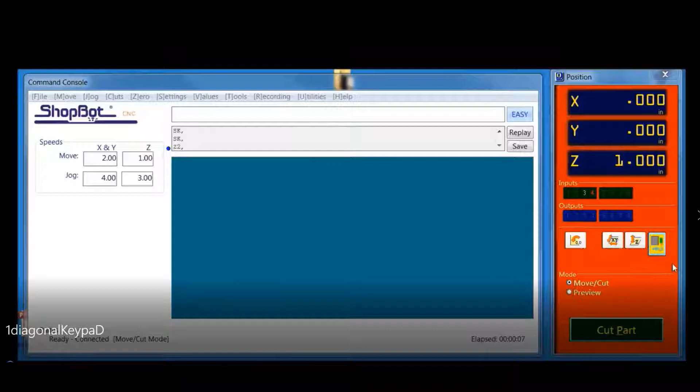All right, so for this first one, let's look at using the diagonal and the keypad. So in the ShopBot 3 software, if you bring up the keypad and you hover in between the arrow keys, you'll see that it says move diagonally in the positive X and the positive Y. So it does say that in that area, but also so you know, all four corners will allow you. Down is the negative X and Y, and again, they may not have the message that comes up, but all four of them do work for plus and minus your different quadrants.

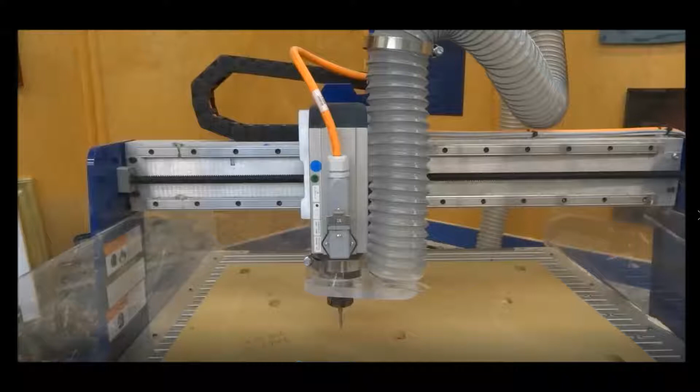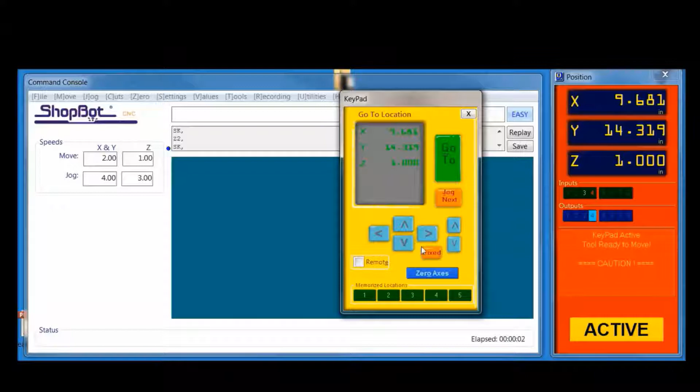So holding up there allows both your X and Y axes to move out of the way. Just a convenient little tip and trick. Allows you to move it positive X and Y axes at the same time. And also, like we saw here on the keypad, if we move our arrow down to the negative portion of it, it'll do the same thing that we were doing in positive and move back down to the negative. So you can do negative X and Y axes here. So that would be in between your keys on the keypad for moving your X and Y axes in a diagonal.

The next one we're going to look at is naming toolpaths. This is something that will really help you when you're out at your machine trying to load files. It helps with organization. So when you get your project ready, this is an inlay sign that we did in a previous training. Really, this just comes down to you coming up with a method that works for you. However it is that you want to label it, so it makes it easier for you to locate, find, and load the correct files. So just a personal preference on this one, and then I'll also show you a couple here that Buddy recommended, because this was his tip of the day.

And what you have here is you have 5 different toolpaths. They're ordered number 1 through 5. They have the name of the project, welcome sign, in the toolpath name. They also have abbreviated or spelled out, depending on what they are. PKT for pocket. You have texture, inlay, cutout for your through cut. Really get into whatever it is that you want to write in there. It's up to you. Things that I do want to point out here is we do use an underscore or a period, and you don't see any other special characters or anything in there.

And what's nice about this is when you go click here to save, whatever you have typed in here is what's going to show up in your file as the .sbp file. And again, that's another tip in the software with naming files, is you want to stay away from special characters, because those in Windows can butt heads sometimes when you're saving a file with a special character in it.

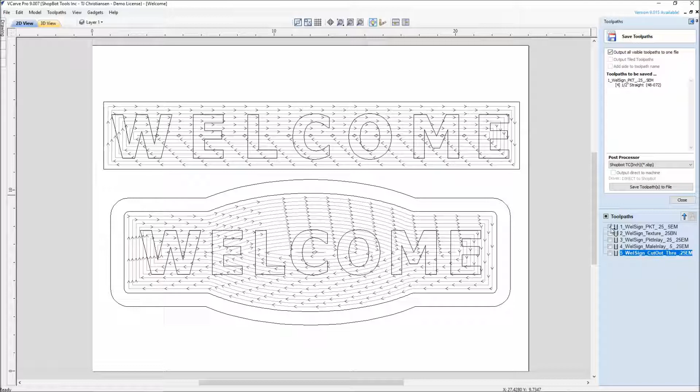And there's still a lot of people that prefer that method, where they like to run one toolpath at a time. So if this welcome sign was something I was ready to go cut right now, there's 2 ways I would go about doing this. One is I have everything highlighted and I hit Save Toolpaths to File. I save that as one bulk file. Or I would click these one at a time. And that's why we have the number in there, 1, 2, 3, 4, 5.

And remember, it's the click. It's not what's highlighted here, it's what actually is checked. And every time you click that one and you save it, that checked one shows up there. And also a tip for you guys at home: you have all 5 of these clicked and you go, how come it's only showing one of them up here? It's because you don't have this output all visible toolpaths to one file checked. If that's not checked, it's whichever one is highlighted here.

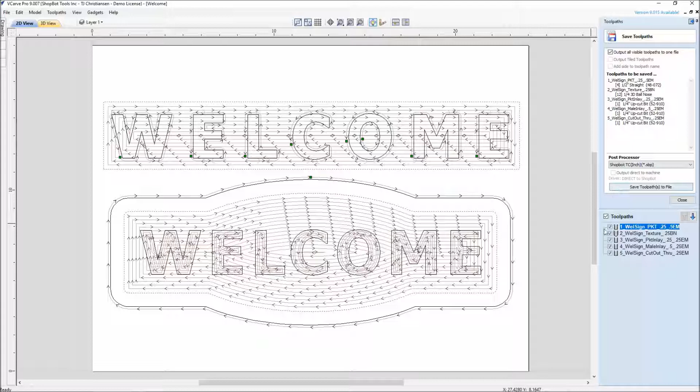So this is a screen that usually gets looked over because we use it the one way that we've only known how to use it. But knowing that if you have this checked, you're able to have multiple toolpaths, which are all 5 with 3 different bits. So again, this one tip has 2 different options. I can save all 5 as one file, or I can save them one at a time.

And just to show you what that looks like here, if I save the welcome sign.tc for tool change, when I go into this file, you will see that it has tool number 4, which was my 1/2 inch straight, and then it goes down through the lines of code. And if I was to scroll through all of these, it's going to find my different tools for my different cuts, and it's going to actually have me pause mid-cut. New path, 1/4 inch ball nose, tool number 12, and the screen will prompt you to do a tool change. So that is a nice feature.

If you have an automatic tool changer machine, it's going to automatically change the bit for you. But even for us that have a manual 1 spindle, 1 collet ShopBot, we're able to just have one file going. Some people prefer not to do this because there could be an issue with re-zeroing. Maybe you forgot to put the clip on, or you weren't ready with the right bit, and then here you are mid-file with a little bit of a hiccup in your process.

So what some people do instead is, underneath my Toolpaths folder here, you can see I named all 5 of those 1, 2, 3, 4, 5. So there's your 1 welcome sign. It's a pocket, 0.25, 0.5 end mill. So there's a really good description in the tool name.

So use some abbreviations. If it was a V bit for V carving, I might go V90 because it's a 90 degree, or V60 depending on what it is. You might also add a U or a D for an up spiral or down spiral. But really, this tip is just naming your toolpaths, or naming your files in general, in a way that makes it more convenient for you.

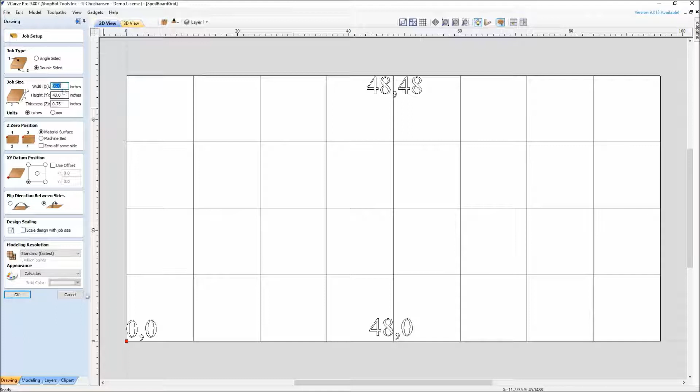Well, this next one was asked by Brian King, and it was a spoilboard grid. This one's really nice for laying a grid out on your ShopBot's deck for layout purposes and for making temporary zeros. So all I've done is, this is a 96 by 48 table, and I've made a grid every 12 inches, 12, 24, 36, 48, all the way up to 96 in the X, and then 48 in the Y. Took my text tool, made my 0,0, and even put on a couple reference points.

I know a few ShopBotters that have done this over the years, and it's really just a nice way to lay out a grid on your machine. So if you are out in your shop and you're going to be using a different spot where you're working, and you're going to put your board down here, you can use the grid that you put in there.

And instead of carving down into your spoil board, what you would use for this is something that WidgetWorks makes, and this one here is called the plotter pen. It's different color Sharpies, and it goes in this little holder; it's not really spring loaded, but it does have some give. And what's nice about all these little WidgetWorks accessories is they come with a nice set of instructions on how to set them up in your tool database with feeds and speeds, but it uses a Sharpie marker instead of a bit, so you're not actually cutting.

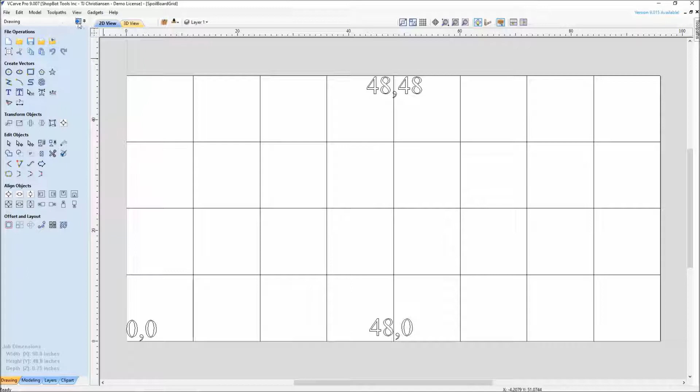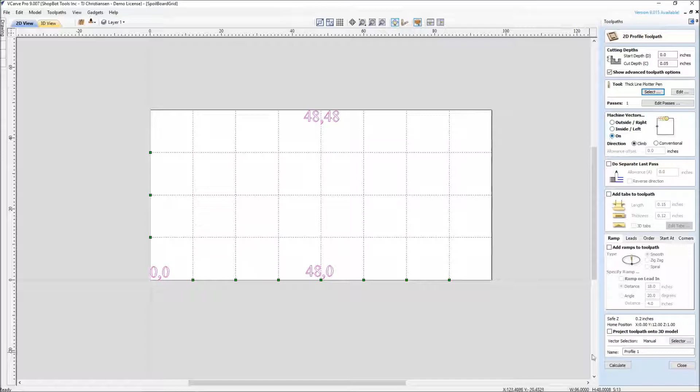And then with this one here, again, you just toolpath this one as a profile toolpath. Select everything, and then, again, I'm using the instructions that come with this WidgetWorks thick line plotter pen. It says to have a pass depth of 0.05. There's my 0.05 cut depth. It's just a profile toolpath on the line, and I hit calculate. And you could go through and set this up to be more efficient as far as your toolpath cut.

But what this would do is lay a grid on your spoil board, and then you have something for referencing, for doing different areas for temporary zeros and holding your part down in different spots. So the only thing I would recommend before you lay a grid on there is to surface your table so it's nice and flat, and it also gets rid of any divots or whatnot in there from the previous cut.

So nice flat table, and then this one is called a spoil board grid, and you could set this up to whatever increment size that you want. Some people have even V-carved these lines down into their table instead of drawing them with the WidgetWorks plotter. So, spoil board grid.

Okay, we had another one from Brian, and that one is safe Z pull-up for your Z-axis. And he brought up a great point: hey, I just got done changing my bit, or I put a bit in for the day, I zero my Z-axis, and it only lifts up half an inch, which means you have to go get your keypad and move it up so you can get your dust foot back on. So to change that safe Z, we'll show you how to do that.

The only thing I want to point out to you guys with smaller machines that don't have as much Z clearance, or if you're using a longer bit, if you put too much of a safe Z pull-up, you could lift your axis too high, and that could top out and lose position. But right here, we are going to look at V for values, and then C for cutter values. VC is our quick command. VC right here, and right here we have a safe Z pull-up. The default here is half an inch.

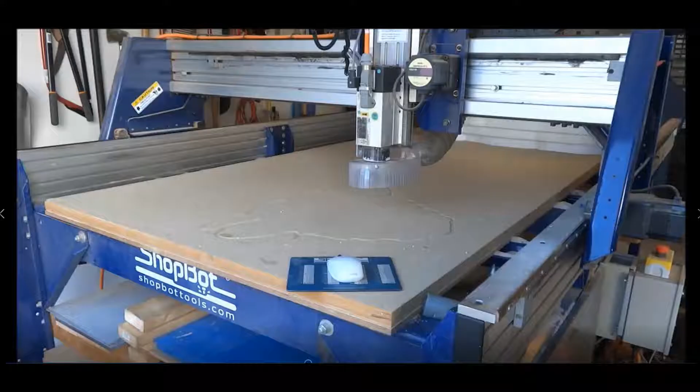And we click on that, and we'll look out here on our machine. And for this one here, I'm just going to use the wireless mouse on the computer. Your left and right mouse keys will allow you to move back and forth, and then to change the axes that you want, that's where that center scroll wheel comes in, you just push that down. So I just switched to the Y axis, and now there's your positive and your negative direction.

And then again, I can hit the center scroll wheel down once, and it changes to the Z axis. Same thing, back and forth. And then again, if you wanted to go back to your X, you would just click on that center scroll wheel again. So there you go, there's remote pendant.

Well, this next one we're going to look at is staying with keypad, and this one was by Matt, and this is keypad speeds. So there's different speeds you can move around while you're in your keypad. This is really helpful on your longer 8-foot and above tables. So here's your regular keypad, and you use your arrow keys for moving it, which is just your move speed.

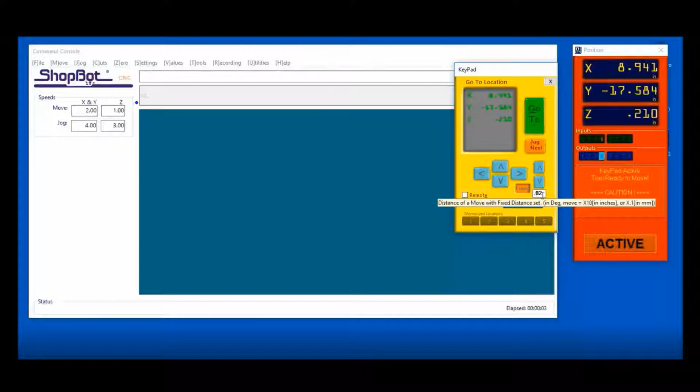But when you hold the control key down and move it, it's now going to be going at a jog speed. So we'll look at those two, and then we'll also look at switching into fixed mode for moving your machine, which is when you click on fixed, you're able to go in here and put whatever setting it is that you want to move your axes by. So it'll move in those exact increments as you're touching it off. So move speed, jog speed, and fixed mode are 3 different ways of moving around while using the keypad.

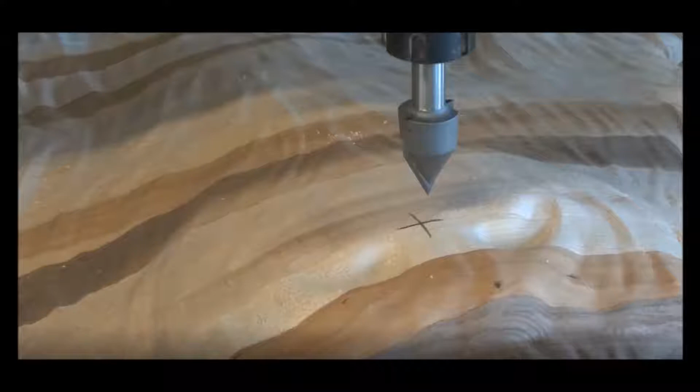So there's move speed. You can see I'll stop, hold the control key down, there's jog speed, and now when I get it close, I'll slow back down to move speed, get it very close to the X, so you can see back and forth. Now it's been put into fixed mode, where I set the increment and then go in there nice and easy.

So it makes it really nice for when you're aligning different positions, temporary zeros, and that would be moving in with the keypad in the fixed mode, and control key is what you hold down to move faster down your axis.

These next few tips are all in the ShopBot control software. These are by Frank, who spent many years with the tech support, so he's seen it all in the software. And one is just going between full mode and easy mode. So some people at home go, hey, where's this big screen coming from with the command console? You may be in something called easy mode, which I just clicked on there. And easy mode doesn't allow operators to go in and change those settings.

So it's really nice in a school where you don't want any variables or feeds or speeds being set in that area. So how to get out of easy mode and back to full is the next question, which is where you click on the question mark and then switch back to full mode here. And okay, yes, I can always click on easy to get back to easy mode, and here I am back at full.

So the first one is looking at changing speeds on the fly, and that one would be just going up here to help menu and printing out this and keeping this next to your ShopBot: the keyboard shortcuts. And I'll bring that up, and I've got to zoom in here a little bit. Apologies, my Acrobat Reader is a little bit large. And what we have here are some different commands that you can go through, and you print this out and have it next to your machine.

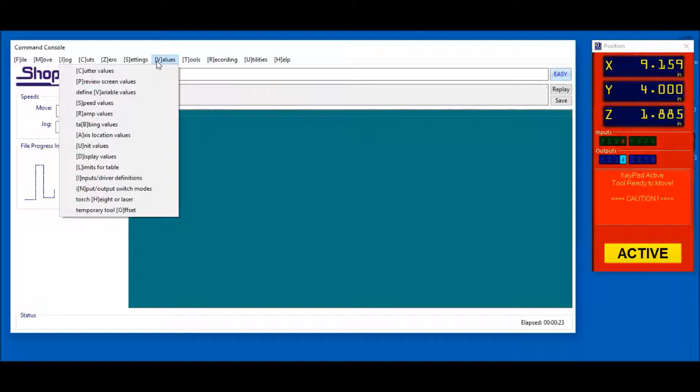What's really nice is you can't always see underneath your dust foot what shape it's cutting out, or the progress by looking at the board. You can stare right here at the computer screen and see how far along in the file you are. So again, this is your file progress indicator, under Values, Display Values, and it's right here - Show File Progress. Just another tip recommended by a customer.

Alright, this next one has a lot of impact for just changing one setting, and it's a pretty neat feature. What I'm looking to show you is underneath Values, Limits for Table. If you're somebody that uses your prox switches a lot, and your default is off, it's a good one to go here and turn on file limit checking. Watch what happens when I turn it on - I hit OK, nothing changes much.

But what's nice about having file limit checking on is when you go to run a simple file, like this one here that says 'far far away' that I want to V-carve, I go down to click my cut part, load 'far far away,' hit open, and hit start. It brings up a message now saying, hey, the X-axis is going to go beyond the software limits. What that means is this software is set up for a ShopBot Desktop, which is what this computer's hooked up to do, and it's going to go past that X limit, or Y, whatever it is.

It would say that on your screen. If you want to temporarily disable that, it means okay, the file's going to move forward and start cutting - so are you okay with that? You better check what's going on. For me, yikes, that's not right - I'm going to hit cancel out of this.

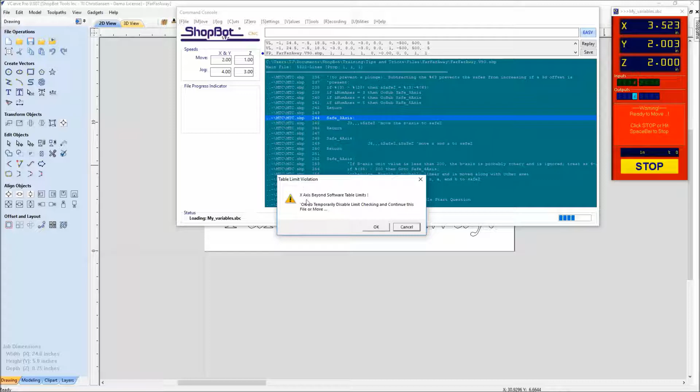So people that use a lot of temporary zeros and offsets may not be someone that turns this on, and that's why it's not default turned on when you purchase your ShopBot, but it's really a nice feature to leave on. So right now it is saying, hey, you're going to go past your X, so let's hit cancel.

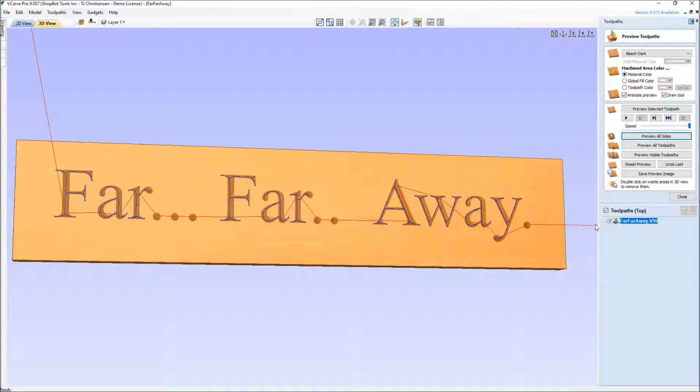Let's go back to our software and figure out what's going on here. If I would have spent the time doing my 3D preview and checking things out, still everything looks pretty darn good. I'm not seeing anything, but a couple little hints where you should be looking when this is turned on. Look at that red line. It's going out past, there's one indication something's not right.

In 2D view here, if I scroll out or hit F for full screen, whoa, I see that there was some extra text way over here that accidentally got highlighted. So what happened was when the V-carve was being set up, this was just maybe some earlier fonts that were being tested, or earlier parts of a project left out there in no man's land that accidentally got selected. Very easy to overlook.

So that's why that limits feature is really nice to turn on. In this case, I would just deselect that and recalculate this. So that one is, again, a very simple toggle in values, limits, turning it on or off, but look at what it can do for you.

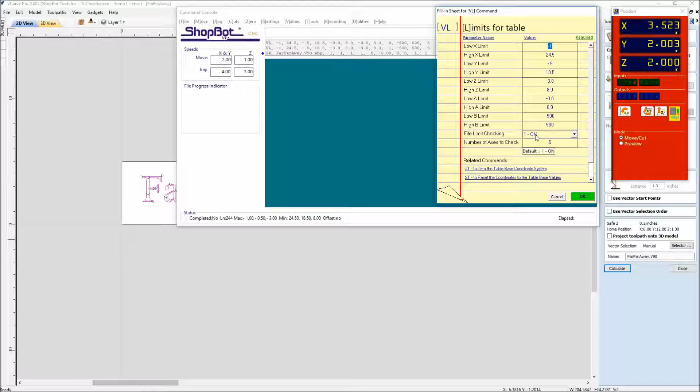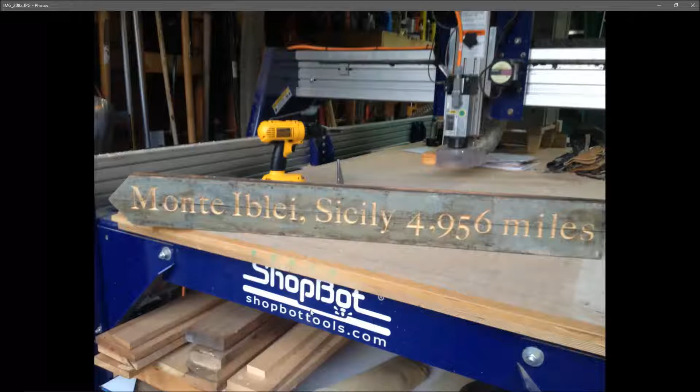All right, another one that was brought up by our staff, by Sturmer here, was when you're doing V-carving, especially with uneven material, to add a start depth down into your cut. It's real handy with uneven material, and you can see here this is a sign that I made out of old flooring from another building, and being old beat up material that's been around for 100 years, just to be safe, so I got down inside of it all. I actually gave it a start depth that was a little bit deeper than what I might have had the V-carving in the software set up for.

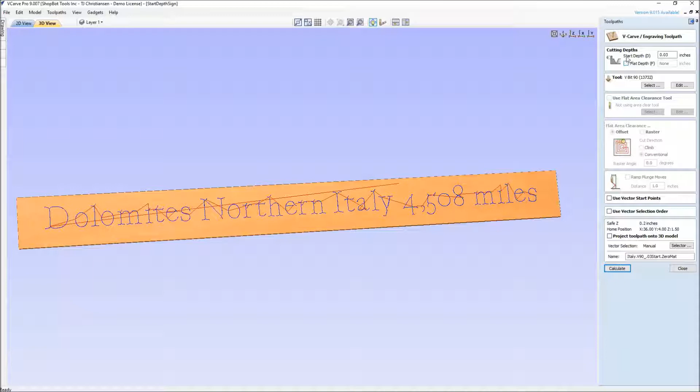So let's just look at exactly what it is I'm trying to say here. So there's just your file, and inside of the V-carve toolpath here, you actually give this a start depth of 20, 30 thousandths, and that will actually take the cutter and go down in a little bit deeper. So you start a few thousandths down into the material with the cut, and it helps out with uneven material. So if you're messing around with different signs, it's a nice tip for sign makers to get around uneven material.

And you can always sand and whatnot to the different spots, but some people are going to say, well, hey, it's cutting too deep or not enough. Uneven material is going to be one way or the other, that's just how it is. So I'd rather go a little bit deeper than not being able to cut deep enough and not seeing the sign. So this one is an example where we would give it a start depth for uneven material.

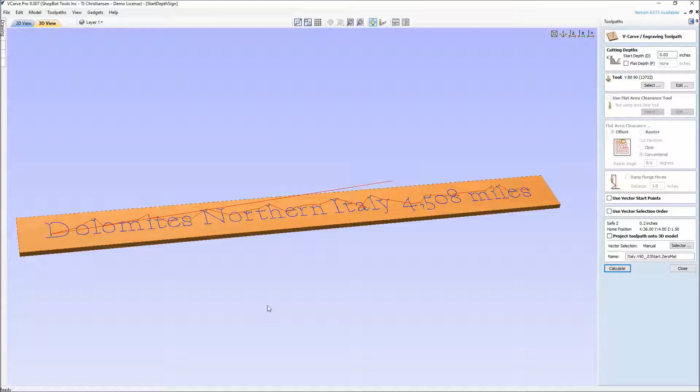One that our customers asked us to talk about is gadgets. What are gadgets? Gadgets are something that are built into the Vectric software. There may not be a key player yet where they're built into the regular icons, but if you go up here, you'll see that you do have some icons, some gadgets that do come with the software. And if you go to About, these are just the things that may be incorporated into the software at one time or another. They may just be left as a gadget, but they're useful little pieces of software that can be added in free of charge, it's just a matter of downloading them.

You can go to this website and read all about these more in depth, but things that I've personally enjoy using are the Gear Maker, the regular grid importer for Aspire, and the dovetail one is always a fun one to do. Dado toolpath creator, chamfers around edges, the auto dog bone is one that people like to use. So these are just parts of software that can be clicked on. Go in there, it explains how to use them, shows you how to download them, has some instructions. And what this would do here, example for the dog bone gadget, is it would go and add dog bones all the way around to any vector that needs a dog bone in the software versus you clicking on them all.

So that is Gadget, something to look into there.

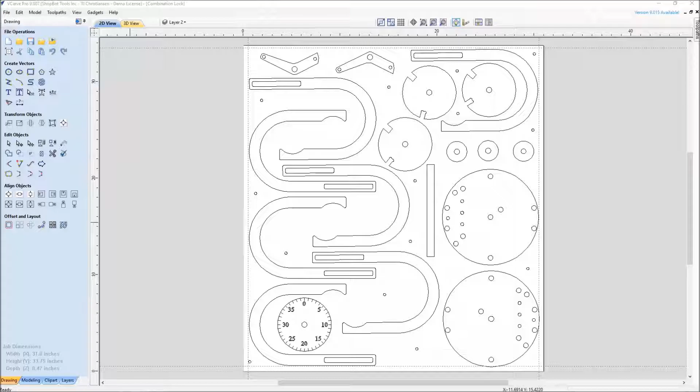This one here is one of my favorites: how to use drywall screws out in the field, meaning out in the middle of your board. How do you put them in without the bit hitting them? On a part like this where it's filled in pretty good, we'll look at the project so you can see what it is. It's a combination lock, one you can download from our website. I would never be able to efficiently put these screws out here and run with my screwdriver, and I need them out in the middle because there's a lot of little parts in this small board.

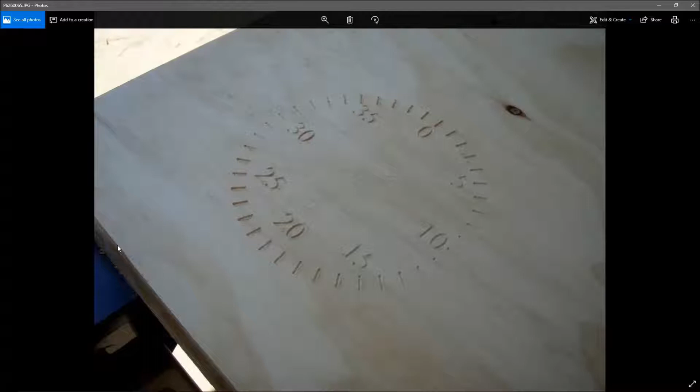So I use the Vectric software to lay out where my drywall screws are going to go, because that's the hold-down method I've chosen to use in this cut. So when I start my cutting, whether it's around my profile or my V carving, I'm never going to hit a screw head with my cutter, because I use the software to put the screws in a location where they're safe. They're close, but they're not going to hit.

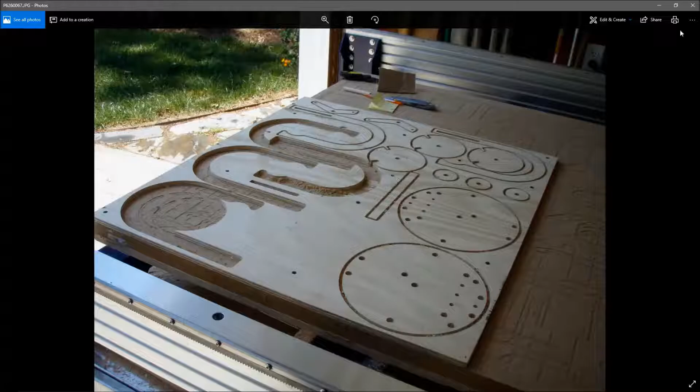So what happens for this, and the way I do this one, is I draw my parts, lay them out, and go as far as toolpathing them all so I know where everything's going to be. Then from here, I go up to where it says turn on the wireframe to solid, and I turn those to the purple solid.

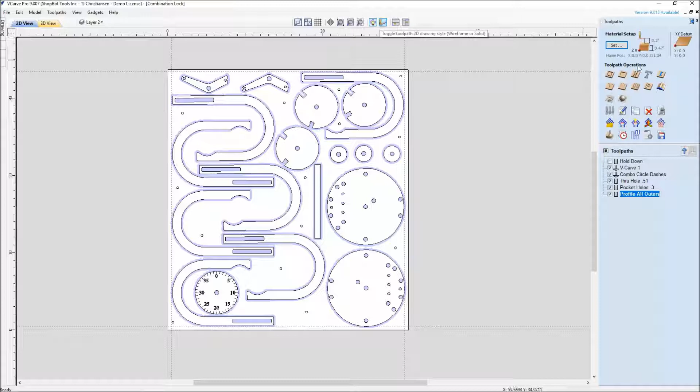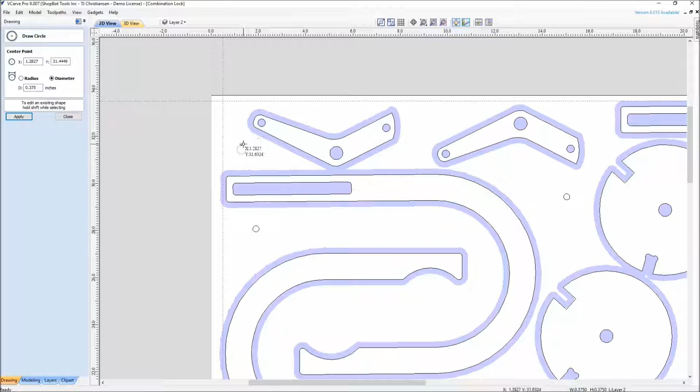At that point, I'll come over here, grab my draw circle command, which is around three-eighths of an inch or so, usually around the drywall screw's head. Then I will place these screws, or circles in this case, in locations where I know if they're not touching that purple distance, they're not going to get hit by my router bit. So you can see where I've carefully placed all of these different screw heads. They may be close in some areas, but they're not going to hit.

Now, when I go to save this toolpath, I will uncheck everything and just save the hold-down method first. So I will save this as the padlock, combination lock, hold-down. I may put some clamps on the four corners, or sometimes if it's a full-size sheet, three-quarter inch, it has enough weight because of the mass of the material.

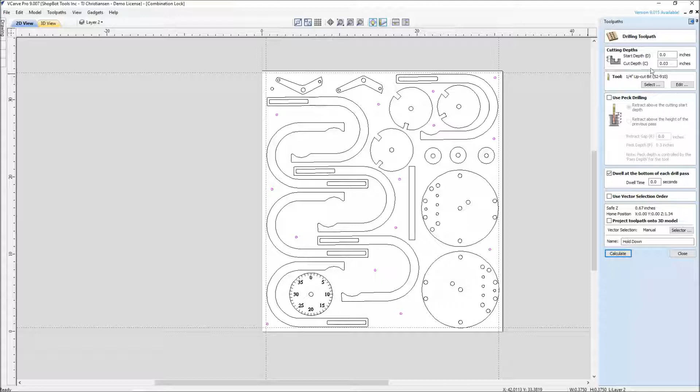All you're doing for this hold-down toolpath is nothing more than a drilling toolpath, going down with my first bit, which is just a quarter inch bit, making a dimple in the material, about 0.03 deep. So it's just dimpling the material and moving out of the way.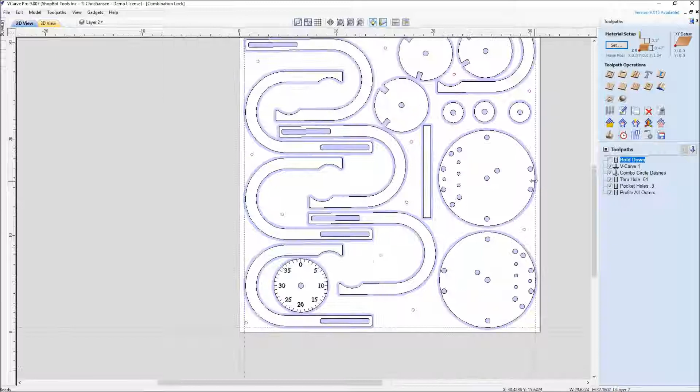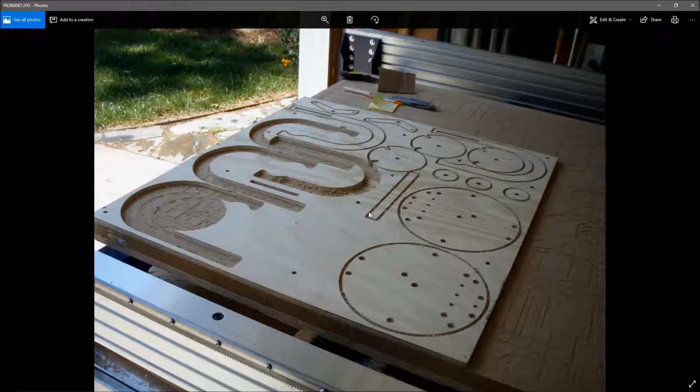Then I take my keypad in my ShopBot software, move the gantry out of the way, and run a drywall screw in each one of those dimples. Then I'll come back and run the rest of my toolpaths minus the hold-down, and now it'll go ahead and cut. That goes right back to where our picture was from before, where now we can see the screws are fine. When we start making our cuts, since we laid it out in the Vectric software, it's in a safe location so we don't have to worry about our little end mill running into one of those drywall screws.

Well, we went through 12 wonderful tips today. There's hundreds more out there. We could keep going and going, but to keep the training short and moving on, we'll do this one again in a few months so you can see a whole other set of tips.